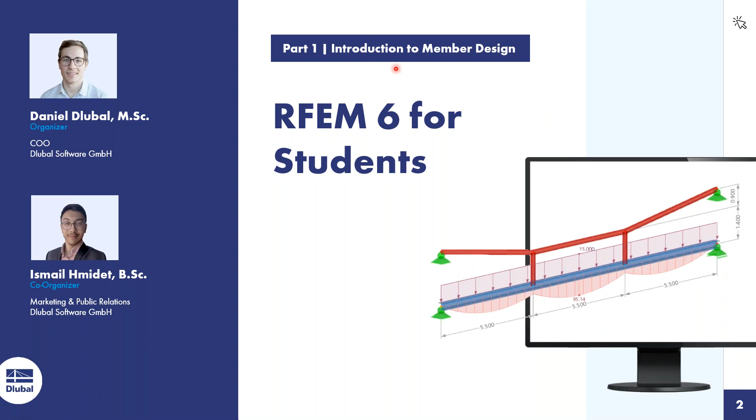We have the part of member design today. We will give you an introduction to member design and a few words about our platform GoToWebinar.

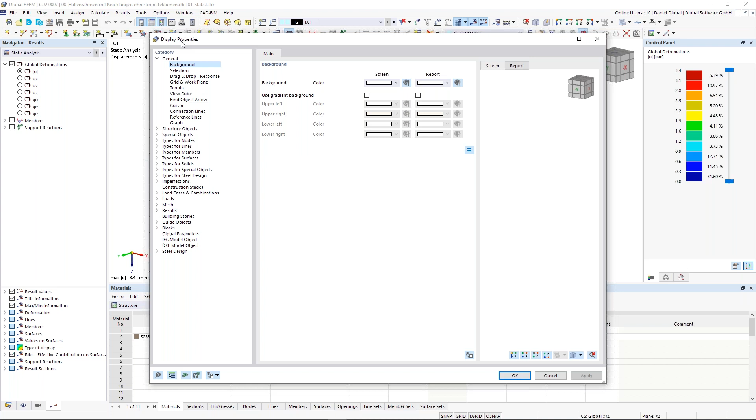Options is quite interesting. I work with a white window, but maybe some of you use a black window, no problem. When I go to display properties, I have the possibility to change the background, load dark background. When I click on that, it changes to dark, and I could use the dark background, so it's up to you how you will use it. I prefer the white background, so I go back to options, to display properties, and choose the white background and click OK.

We have today a lot of international students, so it's interesting that we also offer the program language in different languages. Let's click here on program options and settings, and in the tab of settings you have the possibility to choose a program language from those listed. So for French, Spanish, Italian and so on - we have this language option. There are also some other options, but for now it's enough to know that in the menu bar you find all necessary functions and commands.

Then we have the symbol bar. The symbol bar gives fast access to the most important symbols you need during your modeling, calculation, and load application of your structures. If you want to create a member or lines, just click on that and you can create it. I love working with them, it makes the whole process very fast, and there are also some visibility options here and so on.

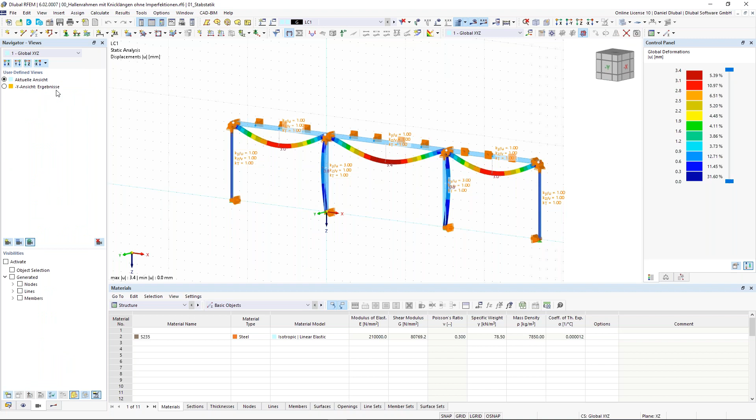Okay, the next navigator is the view navigator. Here I have the possibility to create user-defined views. Currently I see the structure from that view, and when I just want to see the results from the global y-axis or against the y-axis, I can click here and I see it like that.

Then I have also the possibility to set up some visibilities. I activate here, for example, members and choose the member by section. I am interested in the IPE profiles and I see it here like that.

Perfect, so let's jump to the last navigator, the result navigator. Here I have the possibility of showing different results. In this case, the global deformation. When I'm interested in the internal forces, I activate the members, activate the internal forces, for example normal forces, bending moment, shear forces, and of course also the support reactions.

Yeah, so much to that. Then we have the tables, where you have also a whole overview about all objects. You can create objects in the tables, edit them, and change values. This is a huge advantage because it gives you a very structured, very good overview, which is very clearly structured.

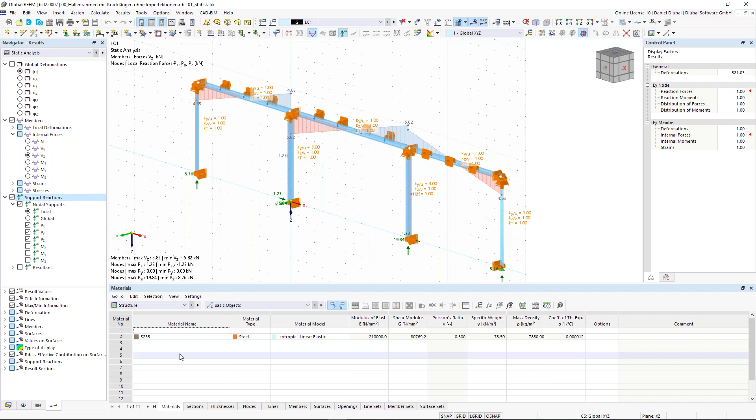I can also jump here to the HEB profile, for example, and adjust it with another profile. I can enter a different name and then it will affect all existing members with that. So it's a huge benefit to control it also via the tables, and it will also be very important when we have the interpretation of results.

Okay, now the control of RFEM 6 is quite easy. It's familiar when you are familiar with other software applications like CAD programs, AutoCAD from Autodesk, then you will get familiar also with RFEM 6.

So with the left mouse button, I can select different things. When I go from the left upper corner to the right bottom, then I can select all objects which are included in the selection window. When I go from the other side, I select all things which are also in this window, but not as wholes. I can select them as whole object. So everything that is touched inside this selection window will be selected.

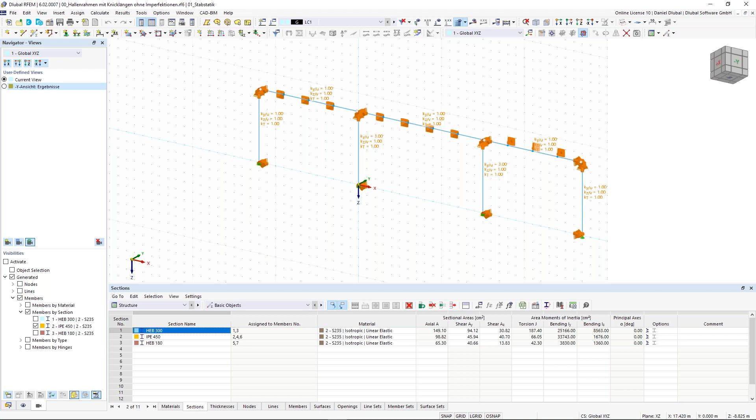With the mouse wheel, I can zoom in and zoom out. When I want to rotate my working area, just press the Control key on your keyboard, press the mouse wheel, and now you can rotate your working window. You can also use this view cube - it's a new function in RFEM 6 that makes it a lot easier to change your views for your structures.

Okay, good. This was the introduction to the user interface of RFEM 6. RFEM 6 is a 3D FEA program for the calculation of members, trusses, but also for surfaces, shells, and solids. With RFEM 6 as the main program, you can calculate and get results of internal forces, stresses, support reactions, and deformation.

When you want to perform different material-based designs like steel design, timber design, and concrete design, you need the add-ons. The add-ons will be part of our later trainings in 3 or 4 weeks when we jump into steel design, concrete design, and timber design.

Okay, now let's start with a very simple example. For those who would like to model with me, now follow my steps. So I create a new model by clicking here in the file and create a new model.

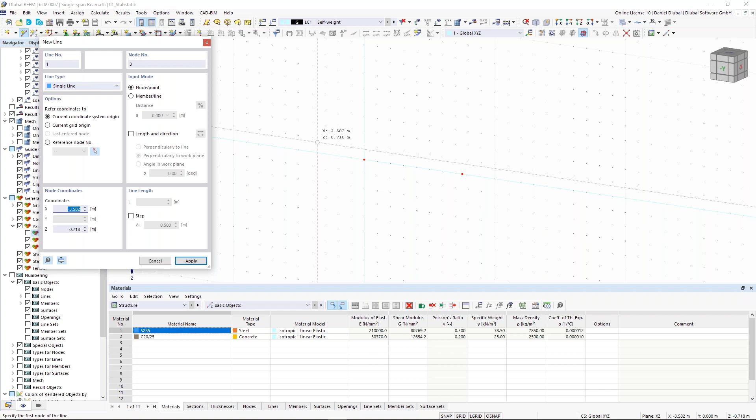So now I see these two nodes, and in order to create the line, I go here to 'line', click on new line, and now I just connect these two nodes with the line. By double right-clicking or pressing escape, I cancel this function or command.

Okay, now we have this line, and as I said before, in RFEM we have the philosophy that different objects are linked to other objects. So now I double click on this line to show what I mean by that connection - I can assign a member to an existing line. So I activate this 'member' option and a new window appears.

In this window, new member, I can create a new member with a member type and assign them also a section. In your studies, especially in the first semesters, you calculate your structural systems with no stiffness, but in reality you have stiffness. In order to consider also the pseudo stiffness in the first phases of your study, I refer to the member type definable stiffness. So we create a kind of fake or pseudo stiffness.

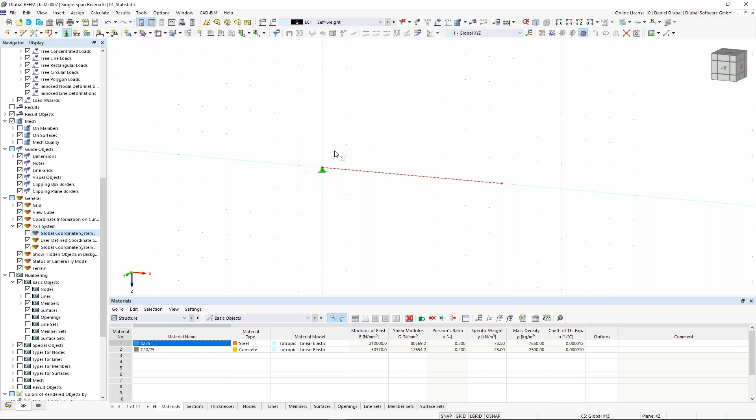So you see here this member as this kind of thing. Now we need support. I go here again to the symbol bar, click on assign nodal support, and I choose the hinged support, so I will activate all translational forces. Choose this node, right click to close the function, and now I go back again and choose the support with the roller in the X direction in order to release the X forces, and now I have here a single beam.

I can show the supports a little bit bigger just by right-clicking on it. I can adjust the size of the graphic, and now I activate load.

In RFEM, when you want to create loads, you have to assign them to load cases. By every new model, one load case, in this case the self-weight, is already done automatically in the background. So I jump to the load case, go to edit active load case. When I want to recalculate or compare my hand calculations with RFEM, it's necessary that you normally don't consider the self-weight, because it can cause you to not get the same results as your hand calculation. So for this simple example, I deactivate the self-weight and rename my load case name to test load. I click on OK.

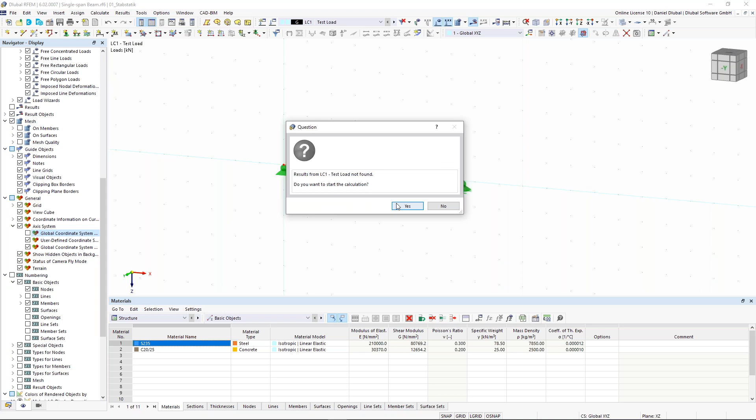So the next thing is calculating the structure. I have two possibilities: I can show the results of this specific load case, or I can calculate everything. In this case, I will show the results of this load case. Then this question arises, and I say yes, because I want to see the results of this load case. In the background, RFEM calculates the results, and then we take a closer look at that thing.

Okay, so first of all, we see the deformation. The deformation is, of course, a little bit nonsense, because we have 99,000 millimeters deformation, since we don't have any stiffness defined. But in this case, only the internal forces are interesting for me. When you have statically determined systems, the stiffness of a structure doesn't have an influence on the internal forces. Only when you have statically indeterminate systems does it have an impact.

Okay, so I go here to members, in the results navigator, and activate the shear force. I see here the shear forces in kilonewton, and then the bending moment, My, 18 kilonewton meter.

Okay, interesting. So now I activate the support reactions. I see the support reactions, also pretty interesting. Now you can make a kind of plausibility check, so compare the support reactions with the shear forces, for example, and yeah, they are the same. So this was the first example.

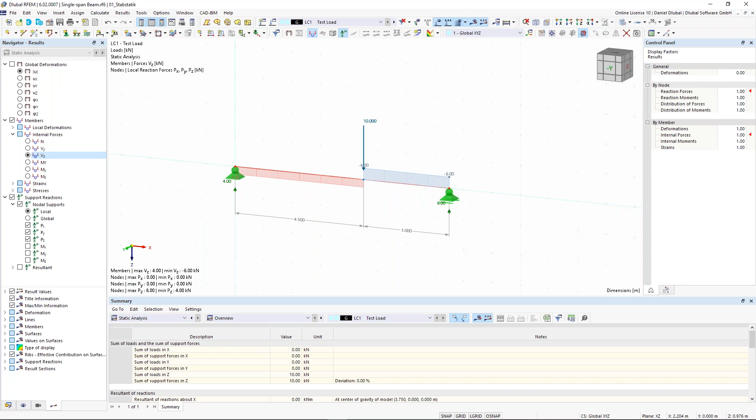On top of that, I would like to show you one more thing. When you want to measure the whole structure, I can give it kind of dimensions. So here in the symbol bar, I click on the linear dimension, click on these nodes, say okay, the second plane, and I can put the dimensions depending on my nodes here, for example.

It helps you make things easier. And one more thing: at each member I can also show the tensile direction. So I go to the display navigator again, activate the tree structure of the members, and in this case I can show you the member bottom fiber - that's the correct word, not tensile direction. You see here this dotted line, and this shows you in which direction the tension would go for the bending moment, for example, and also the member orientation and the member axis. But more on that later.

Okay, now this was it. This was the first example, and I have also a question prepared for you. So let's do this - it's a multiple choice question, so more than one answer can be correct.

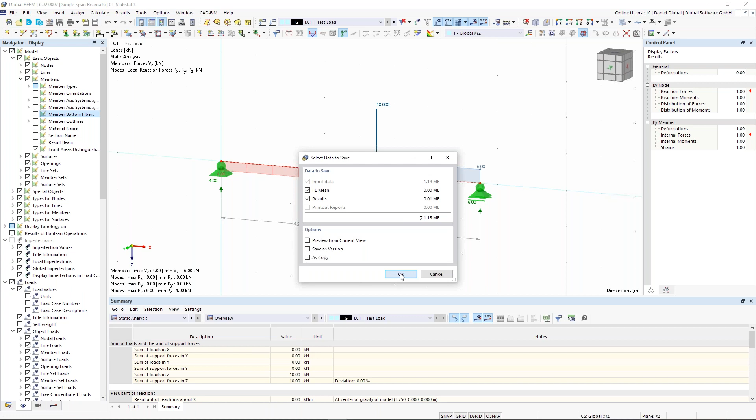I have a two-field beam, so I will save this here. I go to File and say okay, save as new. So I will create now a new file or new model: two-span beam. I click on Speichern - Speichern is the German word for save.

And I delete everything - just select everything and then press the delete button on your keyboard. And I create now two members. So now we have another philosophy for the two-span beam. I click here on the symbol bar, new member, and now I create a new cross-section, a real cross-section.

So I go here to the tab section, and as you see from the last project, RFEM remembers the last sections you were using for your projects. In this case I will create a new cross-section, so I go here, click on this button, create a new cross-section.

And I open here the cross-section library, and I am looking for a standardized profile. So in this case, an HEB profile. I scroll a little bit down and then I will find here this HEB profile. I refer to the Euro norm, so more to the Euro code, and here I find HEB 300. This is absolutely fine for me.

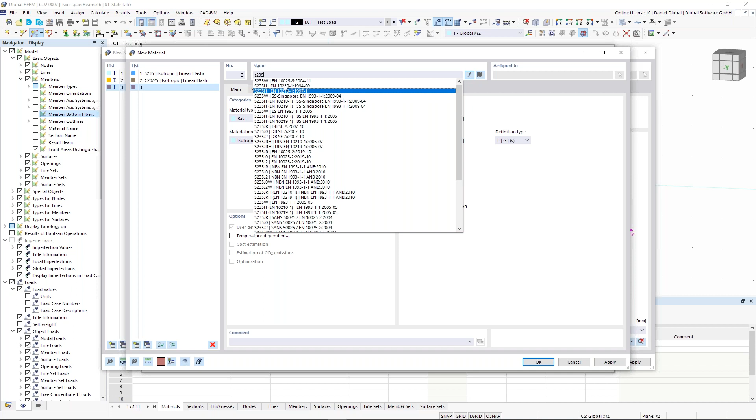So I can enter here S235, and now I can choose the one I would like to have. But I don't do it because I have it already here in this case, so I cancel it, and I just need here this one. Okay, I click on OK. And now you see here for my members that I have this HEB profile and this material. I click on OK.

And now I create a beam with a length of 5 meters. So just go here to this grid point, 5 meters, and again 5 meters. So the total length is 10 meters, but in the middle I have here this node.

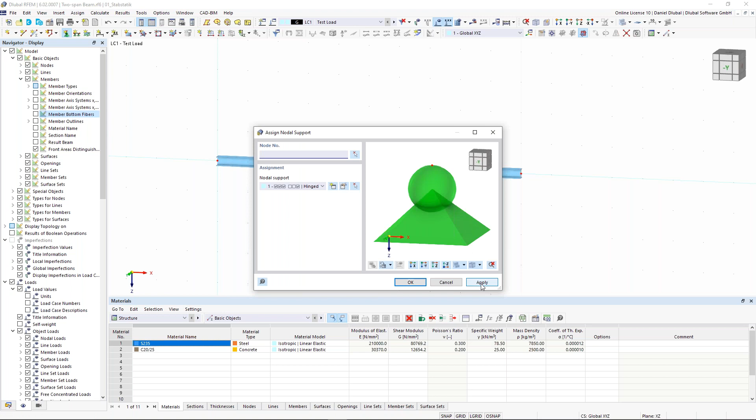The next thing is that I want to have here support directions. So I activate here this nodal support again. And now a very interesting function in RFEM is that we have this apply button, and I show you how it helps you assign different objects easier for your structure. So for the first node, I would like to use this hinged support. I choose hinged, this node, click on OK. And now I don't click on OK, but I click on apply.

And this node will be created automatically. The next thing is that I change the nodal support, choose roller in the X direction, and select both nodes with a selection window. Click on OK again, and now I click again on apply. And now you see how easy you can do this with this dialog. I click on OK, and now you see here the structure. Perfect.

So what's next? Yeah, the next thing is that we consider now different load cases, because when I refer to my PowerPoint, I will show you my PowerPoint. We have here this 2-span beam, and the information about the profile and so on, and also here 3 different load cases. And I would like to combine them in order to determine, first of all, the results like support forces, internal forces, and so on, but also the governing load combination, the leading load combination that causes the largest internal forces, because we will have here also 2 additional load cases like the imposed loads, at first for the left side of the beam and then the right side of the beam.

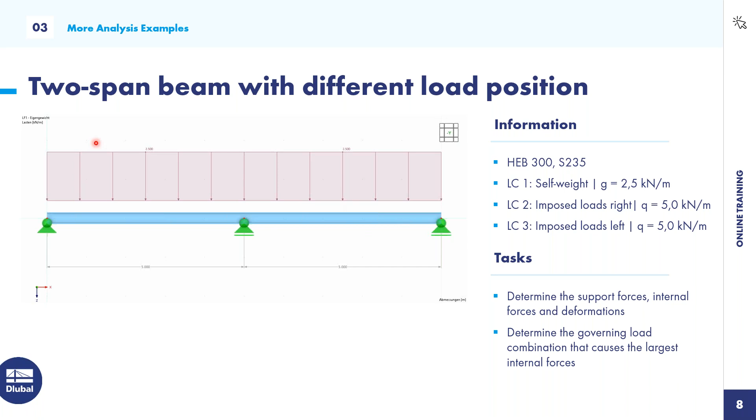Okay, let's go back to RFEM 6. Let's do this. I go here to the data navigator, because you can also access the load combinations or the load cases from the data navigator. Just click here on loads with the right click, load cases and combinations. It will open here this new window. And now this is also pretty nice.

I would like to combine different load cases to load combinations, and therefore I can refer to some standards. I refer to the standard of our Eurocode because I'm from Germany, this is familiar for me. You can also refer to other standards, we offer a lot of other standards, like the American standards, Canadian standards, and so on, and also the classical European ones.

Okay, and now I will also activate the combination wizard, because this is a kind of tool which helps me create these combinations of load cases automatically, and I don't have to do it manually. This is a huge advantage. So I go here to load cases, and I rename here this load case with self-weight.

I activate here the self-weight, and I create 2 new load cases. The new load case is imposed load left. I choose the correct action category, in this case imposed loads category A, according to my European standard. And now I copy the load case and call it right, because with that load case I apply the loads on the right field of this member.

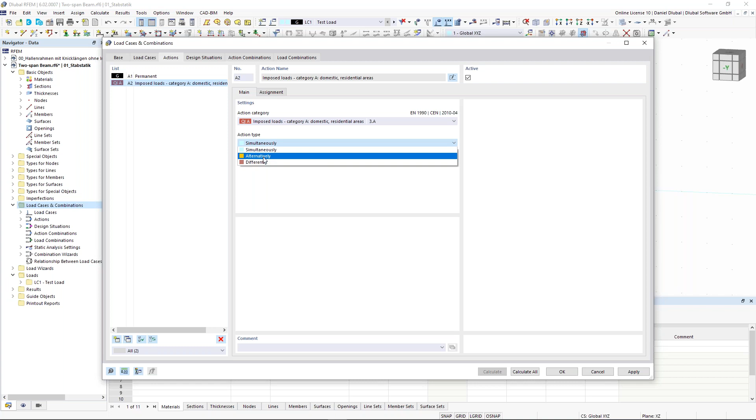When I choose simultaneously, this means that both load cases can be combined with each other. Alternatively would be they would exclude each other. So simultaneously would mean that load case 2 can be combined with load case 3. Alternatively, load case 2 with load case 3 can't be combined.

Okay, so let's go to the design situations. According to the Eurocode, the European standards, we have different design situation types. The serviceability state isn't interesting for me, so I delete them. Just the ultimate limit state, I go here through the information, and here you see short information about the combination rules, the permanent factors, partial factors, and also some coefficient combination, the partial factors.

So it's interesting how the program combines the factors for the load cases. Now you can see here the action combination. Let's jump to the load combination, and let's pick this one. Here you can see the partial factors, that is 1.35 times load case 1 plus the other partial factor, 1.5 times load case 2, and so on. And here you see also these leading load cases or leading action categories. It's pretty interesting just to know how the program considers these different load combinations. Load combination is nothing else than a combination of different load cases under the consideration of these partial factors and combination factors. Okay, I click on OK.

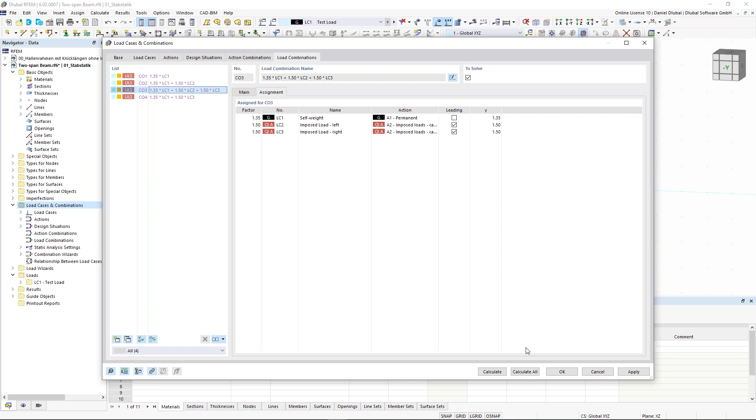Now let's apply the loads to the load cases, and this is the pretty nice thing. I go here to the load case self-weight, I go here to the new member load. And what is now really cool is that I can stay here in this dialog, in this window, and can apply and assign all loads to my structure, and change the load cases in this dialog. This is a huge advantage, and I like this very much.

So I click here on load case 1, self-weight. The load magnitude is in this case 2.5 kilonewton per meter. Now I select the members, draw a selection window because I want to select all members. I click on OK, and now apply and next.

Now this is a perfect thing: I can change the load case, change here the load magnitude to 5, and assign it to the other member, but stay in the same dialog. This is pretty nice, makes a lot of fun for me. I click on OK, say again apply and next, and the same thing I do for the right load magnitude. So for the right load and field, I click here the right field, click on OK, and in this case it is enough when I click on OK.

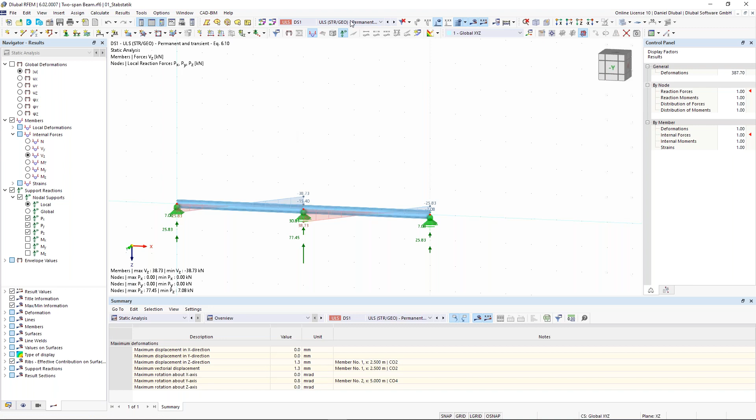Now let's do a kind of verification or validation interpretation. First of all, I always check my results in the self-weight load case because this is clear. I go here and check the results. First, the global deformation. I see the global deformation here.

When I want to see it with some colors, no problem. I go here to the chapter area members, and with diagram, deformation section colored. So the area deformation members and section colored would look like that. You can see on the right side a kind of control panel where you can see these colors.

The next thing is the verification of the vertical or support forces. I see here as sum: the sum of loads in the Z direction is 36 kilonewton, and the same sum here in support forces, so there is no deviation, and this is good for me.

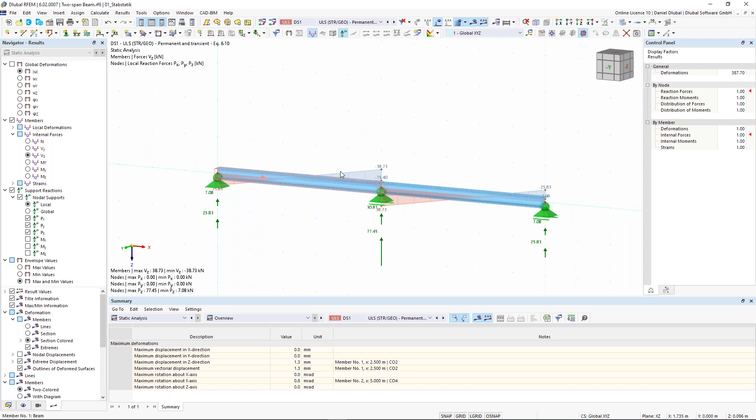Okay, the next thing is, let's go to the design situation. As I said before, I want to see envelope values. So let's go to the members, and now you see different kinds of distribution values of the shear forces and also the bending moment.

I can say, please show me the maximum values. So in this case, the maximum field moment. And when I take a look at the minimum values, I see it here. The minimum is minus 37, so the support bending moment.

This is the summary, and now it becomes interesting because I want to see the results by member. So I go to the table, static analysis, results by member, and I go to the internal forces.

Now I want to take a deeper look at the maximum field moment and the maximum support moment, so the most minimum and the most maximum value. I go to the extremes area, and here I see these two values, these two results.

I see here the maximum value of the bending moment My, and now I also see the corresponding loading, and this is, in this case, load combination 2. And for the minimum value, it's load combination 3.

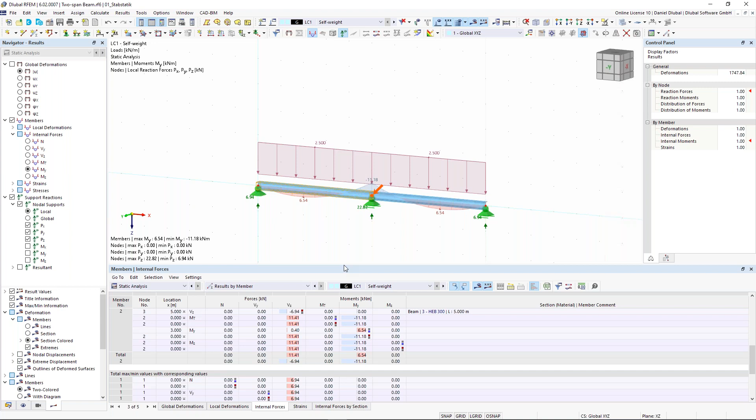So one thing more, I go through the self-weight. Now you don't have to do this with me, just pay attention, because this will help you when you are working with RFEM 6 and during your studies.

When you work with table books where you can interpret results, you just put in your dimensions and you get results for the maximum bending moment or shear forces and so on. It's important to know that these table books don't consider the shear stiffness, and RFEM considers the shear stiffness.

What is the shear stiffness? Taking into account shear stiffness leads to an increase in deformation due to shear forces. In order to deactivate it, you have to go to the cross section, and then you can deactivate it.

Remember here the support bending moment of minus 11.18 kilonewton meter. I go to the sections, in this case HEB, double click on that, and now you can see here the deactivate shear stiffness option.

And the influence of the shear is dependent on the cross-section areas AY and AZ. When I deactivate it, they have no value, and the shear stiffness isn't taken into account.

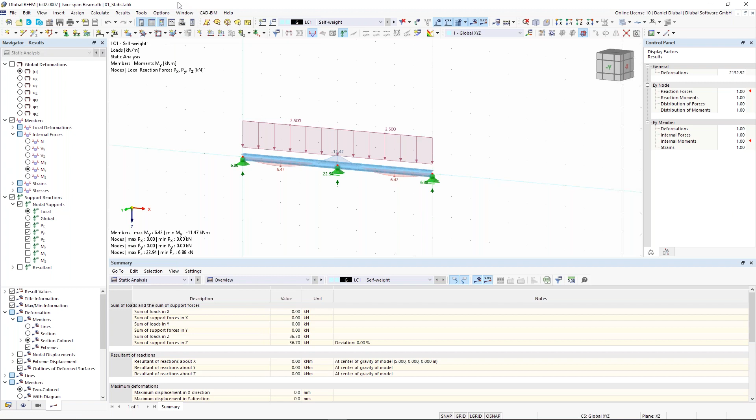So if you want to take a closer look at the standards we support, go to your project or model and right-click base data, or use this option in the symbol bar. Click here, and as Ismail mentioned, we support different standards. Go to the add-ons, where you can activate, for example for steel design, different standards. I click OK, and then you see we support different standards here, and also the different national annexes.

So let's continue. Now I will do an example by myself, so I'll make it a little bit faster. Just watch and learn. I delete everything again — oh no, sorry, I don't want to delete everything. Now I want to add hinges.

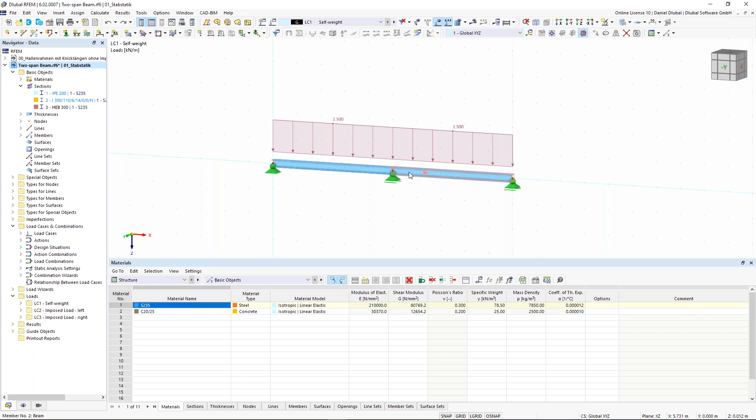This structure is one-time statically indeterminate, so I want to add a hinge in order to make it statically determined. How do I do that? I click on this member, then change the visibility mode to wireframe for better visibility. Then I right-click on members and divide the member by distance, and I would like to divide this member at a percentage of 17%.

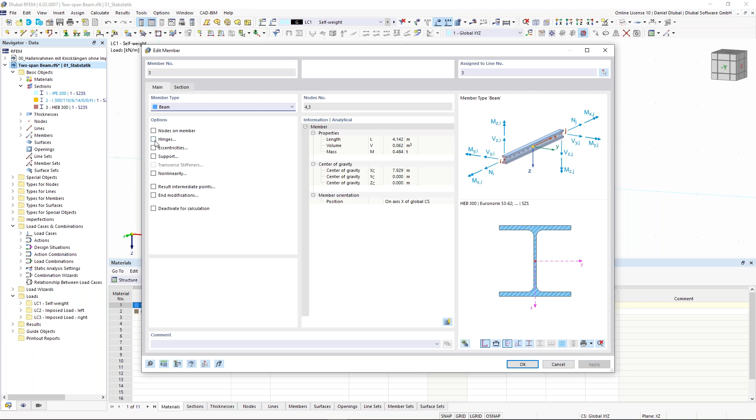Then I click OK, and a new member was created, because I will need this member for the creation of hinges. How do I do that? Double click on the right member, activate the option of hinges, and a new tab appears. Now I go to new member and choose new member hinge.

Now it's important to define the hinges correctly. In this case, the coordinate system refers to the local member axis, and I want to release the rotational, so I activate phi y in order to create a moment hinge, and there the moment will be 0.

When I want to release a translation or deformation, for example a normal hinge or a shear hinge, I have to activate these translational hinges. At first it's a little difficult, no problem, you can release normal forces, shear forces, and also the bending moment. What happens is I activate it and release it, and the value of this hinge will be 0. So I click on OK.

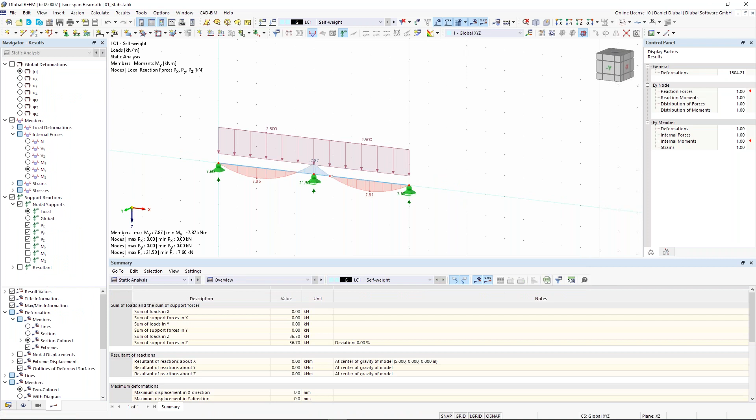We have assigned a hinge here, and this hinge means that the moment is 0 there, and it is 0. Additionally, we see that the field moment is 7 kilonewton-meter, and the support bending moment has the same value.

Interesting, huh? With these kind of hinged beams, in Germany we call them Gerber-Träger, named according to the founder of these systems. Hinged beams let us make these beams quite economically and also statically determined. The previous beam had one degree of freedom free, so when you calculate it with the force method, you need to find this undefined value, and with this hinge we make it statically determined, and this is a huge advantage.

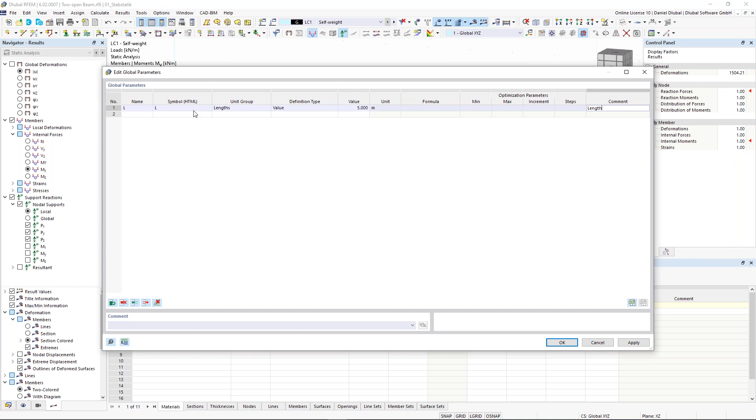And the same thing for this distance, this E, so this 17%, I give it the name E. Now I don't want to use a unit group here, I want to use factor, because it refers to the existing length by giving it a kind of percentage. I give it 0.1716, and this is the factor. Okay, I click on OK.

Now I have to assign these parameters to my structure by manipulating the coordinate system or the coordinates. The first node will remain at its position. The next one needs to be changed. So I activate, double click on this node, I want to set the formula, give the x coordinate the parameter L. I click on this arrow, click on edit formula, insert just my L parameter, and click on OK. Click again on OK.

The same thing here for this node. I activate the formula, and in this case it's L plus the factor E times L again, giving 5.858. I click on OK. And last but not least, I do the same with the last one here, just pressing 2 times L. Click on OK. Click on OK again.

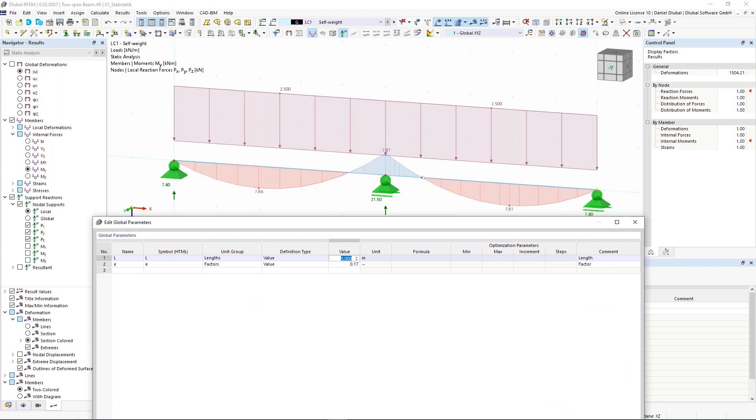And now I want to change the values, so pay attention to the structure. I insert here the value 4, let's do 3, and apply. And now you see how the structure was changed through these parameters. Interesting. Okay, so much to the parameters.

Next thing is just a structural system with various types of loads and also some supports. So I delete this again.

Now I will create the nodes with the tables. I go here to the structure, go to the tab nodes. The next 2 examples you don't have to do with me. I will do it a little bit faster, just giving you an overview about how you can do things in RFEM 6.

I create here a new node, going through the inputs with tab on my keyboard, and now I insert the coordinate 0 and 0, press enter. The next coordinate is 5 and 2, press OK, and the next one is 8 and 2, press OK. Now you see here that I have these nodes.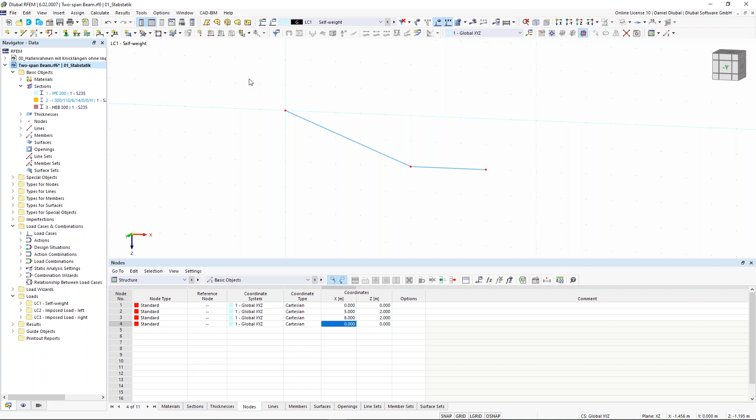Now I create a new member, the same thing, the section is HEB 300. I click on OK and I connect the nodes in order to create my system. Right click, and the next part is that I assign these nodes a kind of nodal support.

So I choose directly a node. RFEM 6 remembers the selection, and this is the reason why the selected node appears here in this dialog. I say fixed, okay, and the same let's do for this one. In this case I create a roller in X direction.

Now let's take a closer look at the definition of the nodal supports. Very important thing: when I want to have translational deformations in my support, then I have to release them. So when I activate one of these rotations or movements, then this support activates forces because it prevents the structure from moving or rotating.

So when I want to have here this support get vertical forces, I have to activate the UZ, because then it prevents the deformation in this direction, and therefore I will also get vertical forces. And the same also for the rotations. Okay, so much to that. I click on OK.

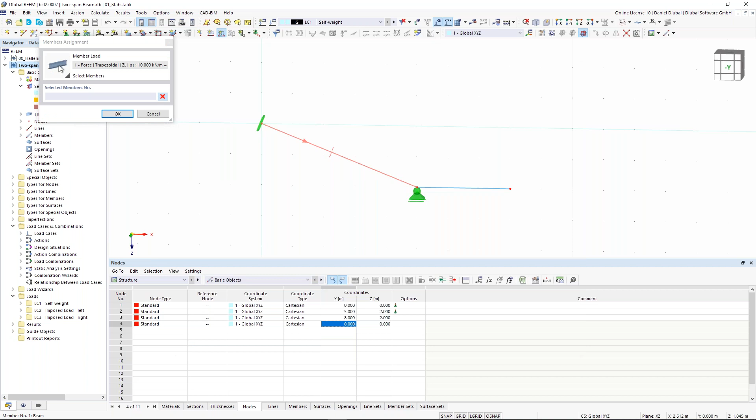I click here on new member load, and in order to have also some linear load distributions, I can say okay, I want that trapezoidal load distribution. I will start at the beginning of my member with 10, leave it here as 0, and say okay, at 80% it should stop. I assign it to that member, and this is now the nice thing, that I can remain here in the same window. Okay, apply and next.

And the next member load is another one on the second member. So I activate here 1 and 2, give them 20%, and choose the second member. I click on OK, and then I click on OK again. And now you'll see here the applying of these member loads, pretty interesting.

And the next thing is that I want to have here a nodal point load. So I go here to the symbol bar, new nodal load. And when I have inclined nodal loads, then I can separate it into different components, or I can also specify a direction.

In this case, we do 10 kilonewton for the normal Z direction. I choose this node and click OK. And now the interesting thing is that I can see the image where the node will appear on the whole structure. I can see it here.

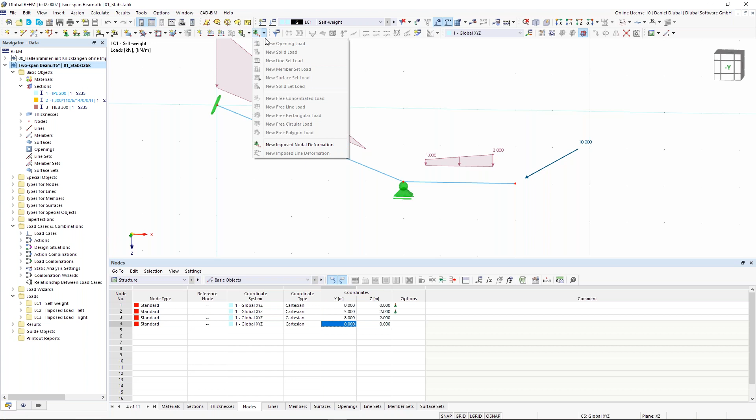And one thing more, I can also give some nodes a kind of imposed nodal deformation. I find this in the symbol bar. I say okay, new imposed deformation. And in the opposite of the global Z direction, I say okay, minus 20 millimeters. I assign it to this node. I click on OK, and say OK again.

Now I will calculate the structure. And for me, the results regarding the deformation will be interesting, because I set to that node a predefined deformation in that direction. And now I will see if it's correct.

Okay, well, internal forces, you can see the internal forces, shear forces, normal forces, and so on. But for me, it's more important the vertical deformation of this node. So I activate the global deformation, and now I want to see the UZ, the vertical deformation. I just want to see the lines, because then it's more clear to see the results. And yes, it's correct. Although there is a support, we have deformation at the support of 20 millimeters in the opposite global Z direction. Okay, so much to that.

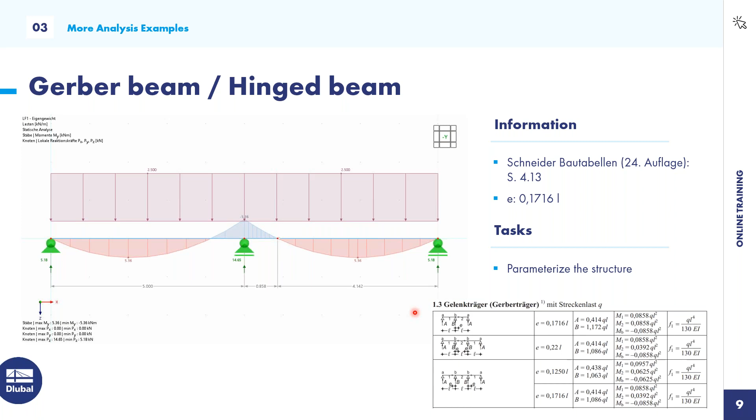So this was the Gerber beam or the hinge beam. Here also I have attached the definition of this E. It's from my student table book, Schneider Bautabellen. Maybe you have something similar in your country, I don't know. This was the last example.

Okay, so let's go to RFEM 6 and let's model this structure. I will use for the columns an HEB profile we had before. This is also an example you don't have to do with me, because I will do it a little bit faster. I will do this, so 5 meters high. Then I go here. Now I make the roof 5 meters to the X, and also 3 meters high.

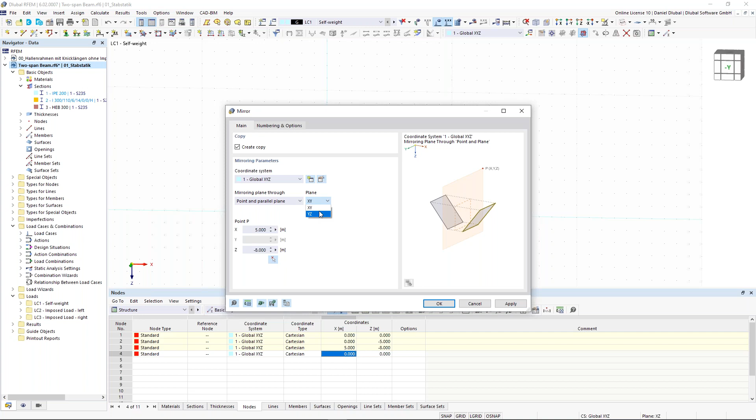Okay, the next thing is that we give them here an additional rod. And now we have different member types. You can see here we have the member type beam, and this member type transfers all internal forces to other beams. I can add to that beam additional hinges. Let's do it in that way, and then I will explain you other member types.

So hinges - I say to them the phi y should be activated, so that we will have bending moment hinges. And for that kind, because it will get tension forces, I can choose a smaller profile. So I will create a new profile. I will choose it here, CHC. I hope it will find. Okay, and I choose here this one. It's a kind of hollow section, circular hollow section.

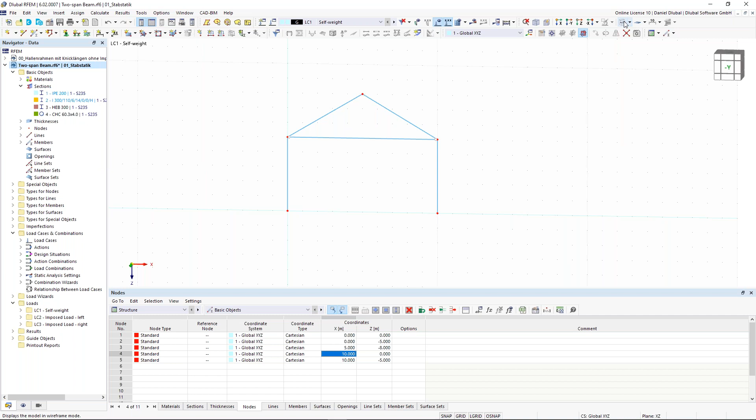Can be used for the applying of normal forces. Pretty nice. And I say okay. Now I draw this tension rod from the left side to the right side, and I change here maybe the display mode in order to see the right profiles. And now I create here the nodal support, click on OK.

And now I apply the loads. First of all, I see here my load cases. I have self-weight, imposed load from the last example. I want to change it. So I go here to edit. I change here this one to snow, and this one to wind, and this one to temperature, because then you see all possible load applications we can do. So distributed loads, single loads, temperature loads, or nodal restraints, nodal deformation, and so on, and now also the temperature.

Okay, next thing is that we activate here the base, deactivate here the standards because we don't need it for now. I click on OK. Now I apply the loads. I jump here to the snow load, go here to the member loads, and I have here 1 kilonewton per meter. And now the load direction for snow loads is different. It's not on the true length, it's on the projected length. I choose here both members. I click on OK. I say apply and next.

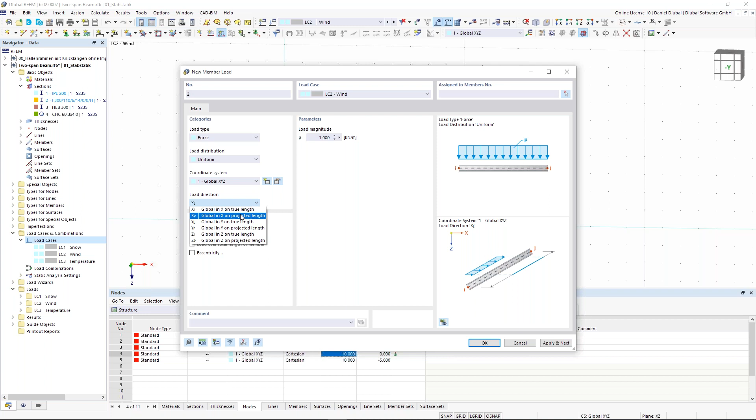And now I choose here the load case wind. Here the direction is to the global X-axis. So I say true length, first of all on the column. It doesn't matter if you have it on the projected length or the true length, because the column is vertical. Column, I say okay.

And now I want to refer and apply my load according to the local member system. So I say, okay, I want to have it like that and put it here, because normally the wind pressures are on the local axis of my inclined beams. So I say apply next. Now it looks like that.

And now the temperature, I will do it here a little bit different. I cancel the whole definition because I wanted to show you how you can make an object selection. So first of all, I want to display different cross-sections with a different color. So I jump here to the display navigator, scroll down to the area of the colors of rendered objects.

By object property, member, and now I want to see them by the sections, like here. So I have here the brown color for this HEB profile and the green color for this circular hollow section. And now I want to select all sections with the type of HEB 300.

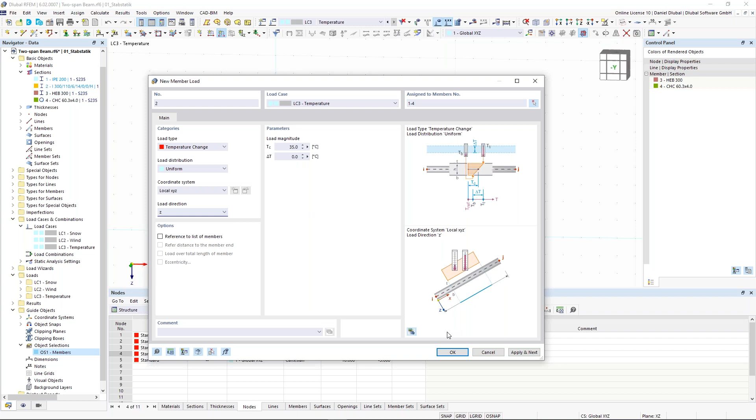Good. Now let's calculate all load cases. Then we will take a closer look to the results.

Okay, perfect. So as you can see here, maybe for the snow load, you see here the deformation. You see here the deformation. And also the internal forces, and as assumed, the tension rod gets tension forces.

And also when I take a close look to the members, I see it like here and so on. So now we have in Rfem different member types. This member type is a beam, but with hinges at the end of the member. In order to consider the same structural behavior, I can also choose the member type truss. Truss is nothing else than a beam type, but with moment hinges at the end of the member.

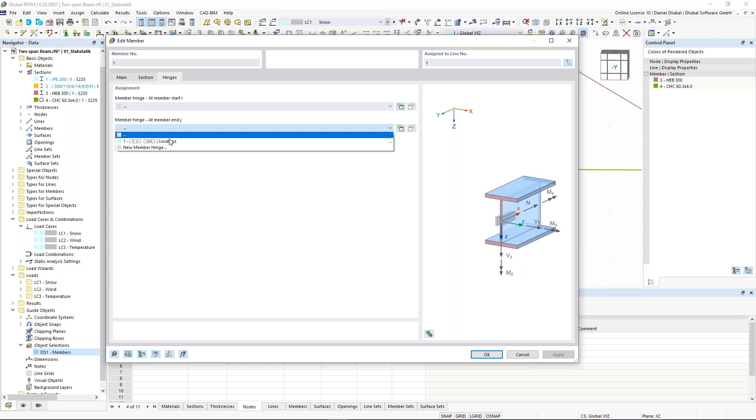When you want to have a whole hinge to be considered, it's false that you assign to every member a hinge. So if I assign a hinge at the member end, and to that member a hinge at the member start, then this would be nonsense, because RFEM crashes. We have a hinge chain, and this chain is not right, because it would cause an instability in the program, and the program doesn't calculate this.

So we can test it. I activate it. You see here this error and failure because we have a singular stiffness matrix, because the structure is unstable at that node due to the chain of hinges.

In order to avoid this, you have to remember just one thing. If you want to build a complete hinge where all members connect, you have to leave one member without a hinge. So I show you now the correct modeling of this thing.

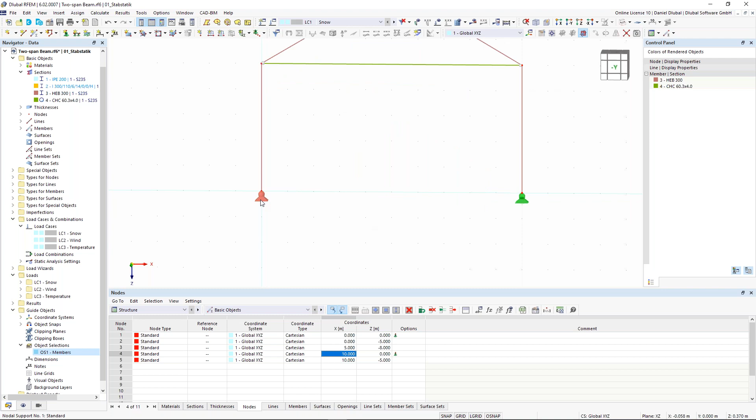I deactivate the hinge here, and now I want this whole triangular arrangement so that everything is connected with hinges. First I change these nodal supports to fixed ones, and then I assign a hinge at the top, and the same for this member. Click OK, and this would be the correct definition when I want to consider hinges everywhere.

I don't know the exact English word for that, but when I want to consider hinges everywhere, now I calculate this, and when we take a closer look at the bending moments, we will see that the definition was correct. Yeah, and we see it here. Here we have the bending moment, and every time where there is a hinge, we have zero moments. This would be the correct definition of the hinges for that case, for example.

Okay, next example. A truss, what we have here. I go here to the PowerPoint.

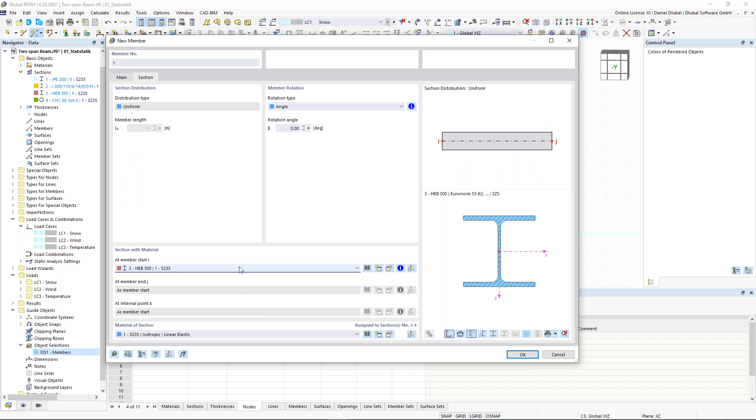So I delete this structure again. I create here a new single member with the truss type. This is important for the correct consideration of this truss. The section is, I take again this HEB 300 profile, and click OK.

And now I create this new member, but this was unfortunately the wrong way here. I have to do this by the general option, so I have to redo it, but no problem.

Now I put in the length and also the direction. I have here 3 meters, all sides are similar so I choose this one. 3 meters. Angle in the work plane is, in this case, minus 60 degrees. Then I can do it like this. I change this. I have it like this now.

So now I draw, or I can refer to this member. I say OK. From that array, and now I have this triangle.

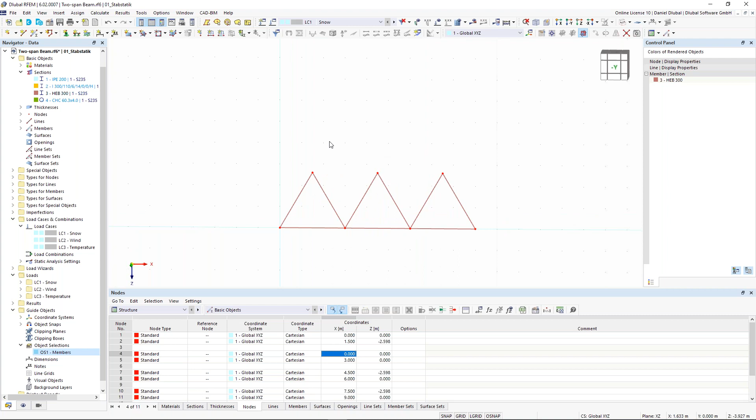So then I create again a new single member. I choose here the same object properties in graphics, so this enables me a smooth way to insert different objects or members, for example. I click here on OK.

Let's connect these two members. Now I have to correct the member type because I created them as beam type. I select everything and double click on one of the members. There are several members to assign, so I choose truss, and I can change all members at once to the member type truss, which carries only normal forces.

The next thing is assigning nodal supports. I give these nodes a hinged nodal support, and here again. Let me make them a little bit bigger, like that.

Now I assign nodal loads to these nodes. I go to new nodal load. I select the first node with 10 kilonewton, click OK, apply, and next. The next one with 20 kilonewton I assign to the right node, click OK, and say OK again.

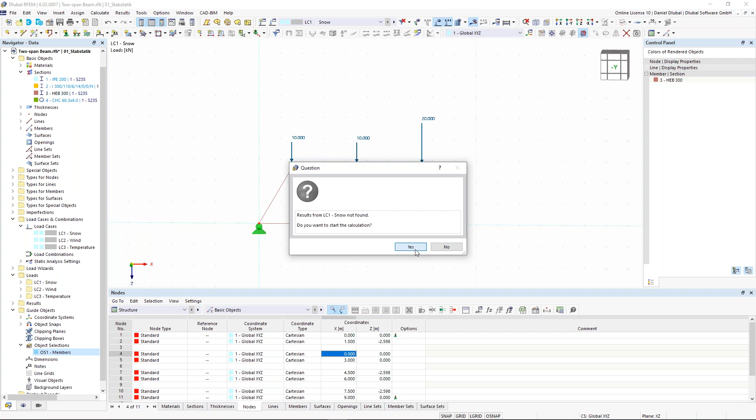Show me the results, I say yes. The special thing about trusses, and also about the member type truss with only normal forces, is that only the stiffness in the length direction is activated.

Let's take a closer look at the results. You see no moment, only normal forces. When you see member type truss only N, that means only normal forces are carried, and only the stiffness in the length direction is considered.

So let's go back to the normal forces. Remember, all compression forces are in general negative, and in RFEM, with the standard display options, they appear blue. All tension forces are in general red and positive. Here you see the tension chord and here the pressure chord, with the different normal forces. Again, negative normal forces are pressure members, and positive normal forces are tension members.

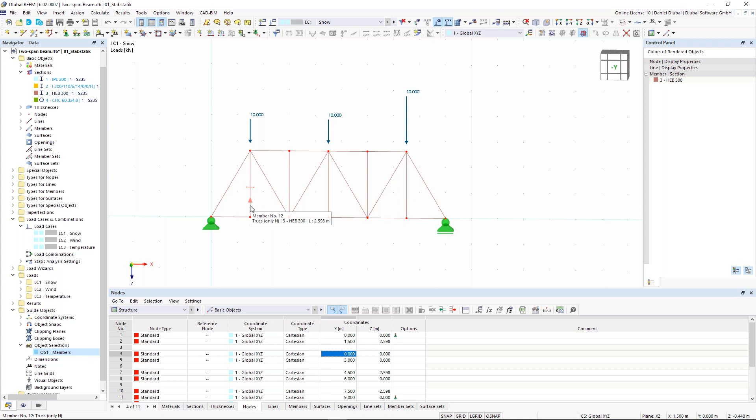Perfect, and the last one for that. Okay, good. There are different rules in order to determine these null members. These are the members which don't carry any normal forces, but are sometimes responsible, and also mandatory, for the whole statical indeterminacy.

Let's take a closer look at that. I will calculate it again. A classical student example would be: calculate this truss structure and determine the null members, the members that don't get any normal forces, and then also determine the positive and negative normal forces, the tensile and pressure members.

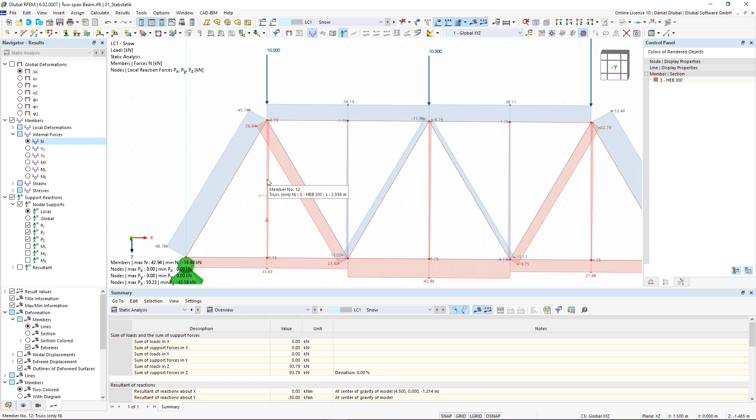As you can see here, these members get some normal forces. This is a little strange, but I can tell you why: because I considered the self-weight. Here in this load case, I deactivated it. Now I calculate it again, and now you will see these members don't get any normal forces because of their structural behavior. Yeah, no normal forces. So much to that.

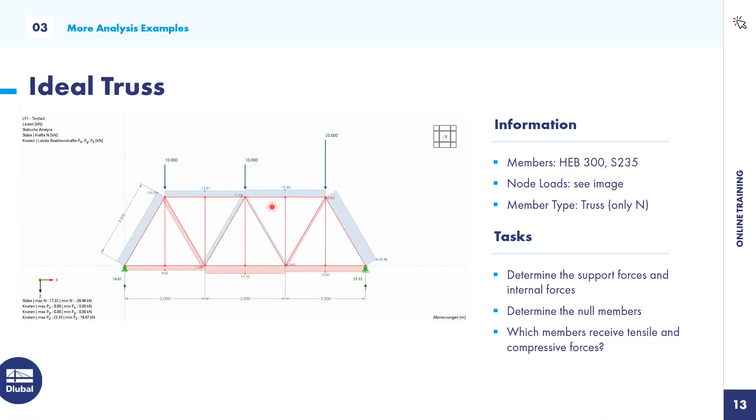So this was an ideal truss, but in reality we have trusses which also carry some loads, where the loads are applied on the structure, not on the nodes. So I delete this again. Now I will do an example where you don't have to follow along with me. I'll do a kind of spanned beam example. Here we have a normal beam which carries bending moments, which is also bending active, and this supporting tensile structure is just carrying normal forces. So let's model it.

So I create here again a member with a HEB cross section. I click on OK. And the length of this member is 16.5 meters. I say OK.

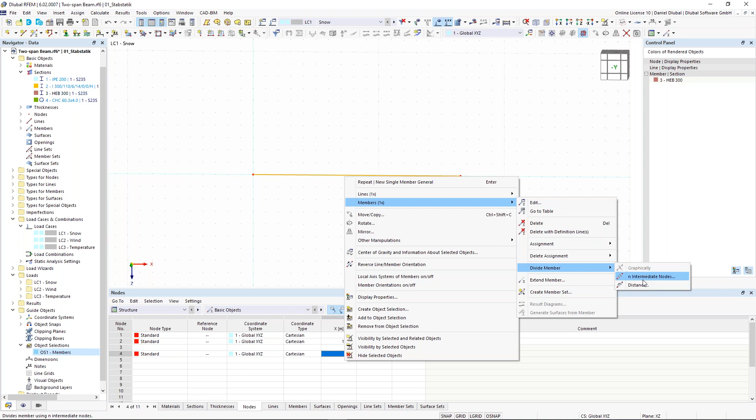Now I divide this member internally into two nodes in order to get two nodes. So right click on that, members, and divide member now into intermediate nodes, because they will have the same length. I click here on 2 and select this option.

This option will cause that the member is not divided into different members, but we will get the nodes. So here we have the blue nodes, and you see, when I go through the member, it is one member and not three members. But I have these nodes, and this is pretty nice, because then I can refer to this structure more easily and see the results more easily.

The next thing is that we create another kind of member. In this case, the truss, only normal forces. Section is this IPE 200 profile, because it's a little bit smaller. Now I just choose the length and direction, 1 meter, and go here 1 meter upwards.

Now I want to create here also a member. I choose here these two nodes and these two nodes by clicking on the Control key. Right click on one of the nodes. I say move and copy. Now I can create a copy of the selected nodes. I say yes, I want to activate it.

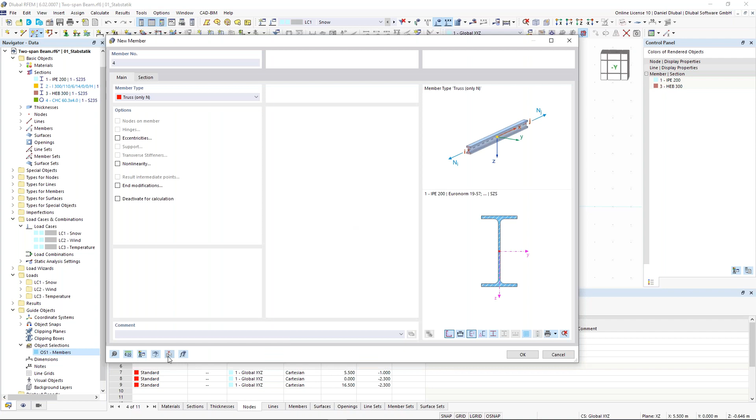Now I will connect these two lines. So I take here this beam. In this case, the truss only N, and I refer to this cross section. So I choose here always this select object properties in graphic. I click on OK. Now I draw it. So perfect.

So I change here the display model, and now I see that these local node coordinates are incorrect. So I want to change them. I double click on one of these nodes, and I can change the coordinates, and in this case I want to change them at -1.4, so it goes a little bit upwards. I say okay, and now the structure looks like that.

Okay, now I refer... now I have to assign some nodal supports. I choose here these nodes, give them this fixed support, and the same here for this one. This will be a roller support in X direction.

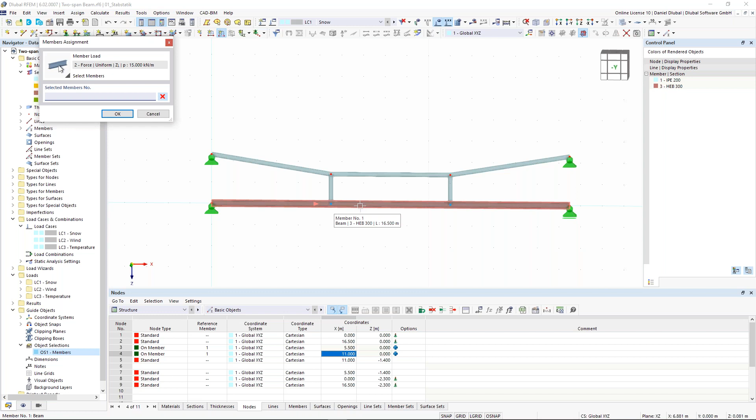Okay, and now I create also a new member load. I go here, click on new member load, enter a value of 15 kilonewton per meter, click on OK, and choose this member. The high advantage of this division with intermediate nodes is that I can assign and apply this load to one member. I don't have to click on three members. This is one of the advantages when I divide the beam into one beam.

So I divide this beam into two internal nodes, but the beam will consist as one beam. This is a high advantage in Rfem. Also the loads I can show a little bit smarter.

Yeah, now I calculate the result. Say yes.

And now you see here the result. You see here the tension forces. Yeah, because we have activated the normal forces and also the bending moment. And this example is pretty nice because it shows the following thing.

When I take a closer look at the deformation, you see, due to the load applying on the beam, it deforms downwards. Yeah, but we have here these tension members which carry the member, so the beam, and this is also the reason why these things get tension forces.

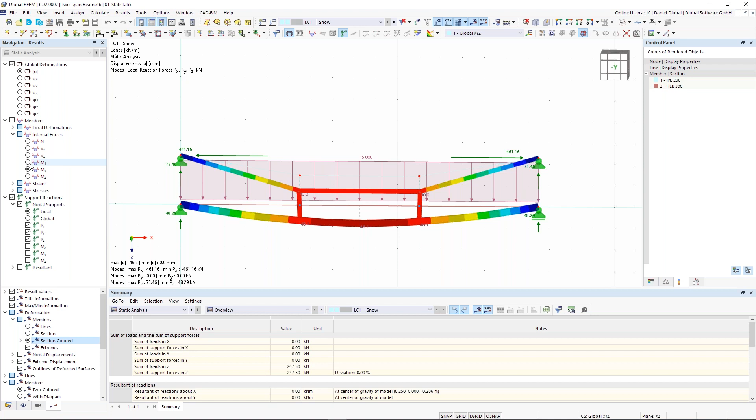And this explains also this interesting bending moment distribution, because here we get additional normal forces. You can see it as an additional support, and this is the reason why the bending moment looks so nice here. Also the normal forces. Okay.

So, we last do have an example. Yes, Daniel, real quick about this example.

I got a pretty interesting question about how we would model a double beam if, for some reason, the bottom chord fails, and it's already in place, and an engineer decides to add another beam. How would you model that in RFEM? Would you add another beam over the old beam, or how would you try to model that? I'm not sure I understand the question, but if you do, maybe you could answer it. If you already have an old beam as the bottom chord and want to add another one in real life, how would you model that in RFEM?

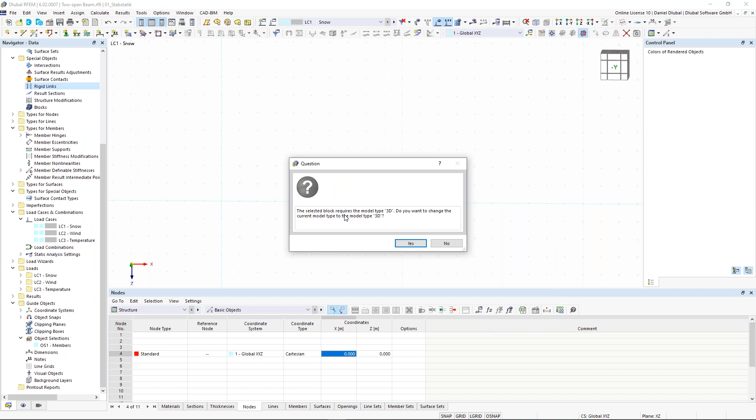So here in the Dlubal Center, we have blocks, and there I can create trusses, for example. I choose this 2D truss, and I can generate this kind of truss very easily by just giving the block some parameters. I click on OK. I choose this one, I say yes, because now the block requires the model type 3D. I say yes, because we will also use this model type 3D for our next examples.

So next thing is that we see this truss - pretty nice. For those familiar with programming languages and scripting, these kinds of blocks were created with the programming language JavaScript. So if you are familiar with JavaScript, you can also program your own blocks, and this is very powerful. This is also one of my future theories regarding the whole civil and structural engineering field - that students should know how to program, because then they have a real advantage in modeling, defining, and designing their structures with different parameters. So I can only recommend learning JavaScript or any other programming language, even if you are a structural engineer.

So let's go back here to structure. I put here number of bays: 6. The input via - I can choose between 2 different lengths. I choose this one. Total length is 12 meters, so the length of the outer bay is 3 meters, the inner bay is also 3 meters, and the height of the truss is 2.5 meters.

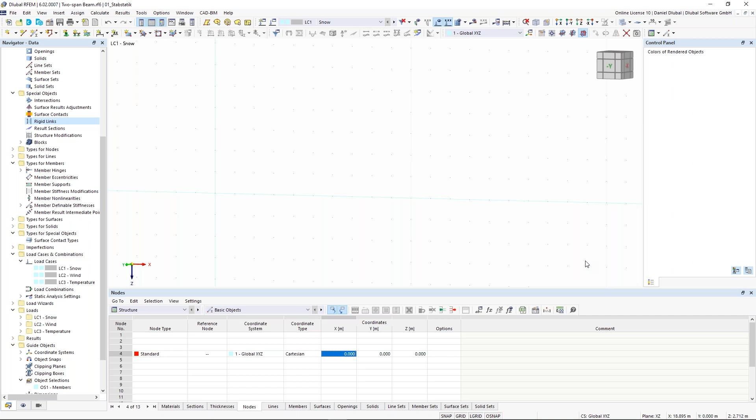So for that, I will model a very easy Euler case. It's just a fixed cantilever column. So I create this one. I click on beam, and now the section will be an HEB profile. I click on OK.

10 meters high. And now we need here fixed support, and on the top we need here a single load. In this case, I give here 100 kilonewton as vertical load, and also a small horizontal load in order to see the effects of the analysis according to the second order.

I click on OK. Now it will be interesting. Oh sorry, this is not correct. This one, I have to assign this one to the number 2.

Now I go to the load cases, because in the load cases I can assign the static analysis. So first of all, I will change here these two load cases, and I say this theory first order, and this one will be the second order.

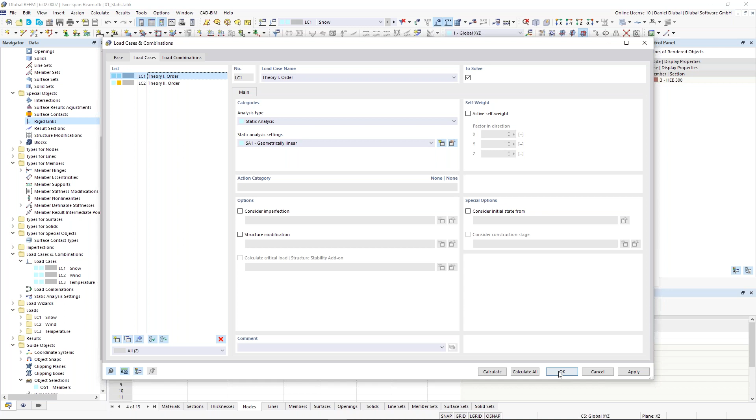When I want to consider P-delta or the second order, I have to change here the static analysis setting. And normally load cases are calculated according to the first order. So I activate it. I go here to load case 1, okay.

You see here the load case 2 and load case 1. And now I want to calculate both load cases, and then I will show you the differences in the calculation. I say calculate all.

Now I will create new windows. I will create a new window here, and again, now I can show several windows vertically. This one I don't need, so again, perfect. This will take a little bit. Here the same.

Okay good, here we have the results of the first order, and here we show the results of the second order. So first of all, the normal forces, but for this fixed column, cantilever column, the bending moment is for me more interesting.

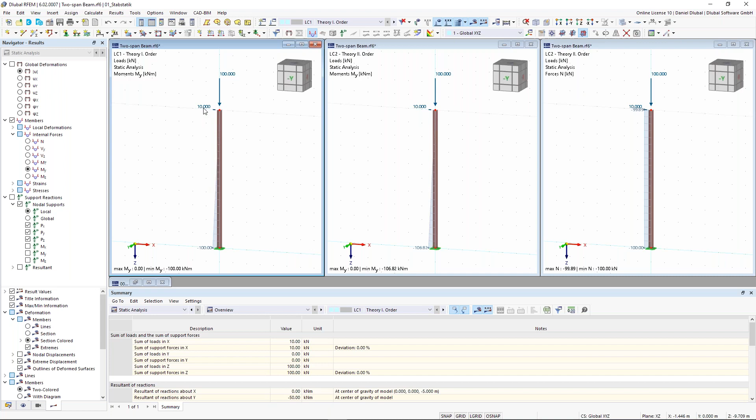Okay, so let's take a brief look. I think calculating the bending moment of this cantilever column is no big problem, because 10 kilonewton times 10 meters, so the height, this is my bending moment here at the support. This is according to the first order.

So when I calculate according to the first order analysis, then the program makes the equilibrium at the undeformed system. When I calculate according to the second order analysis, then the program makes the equilibrium at the deformed system. So you see here the differences.

Here, first order 100 kilonewton meter, and here 106 kilonewton meter. So we get more moments. And why? Yeah, because we have here also this vertical load, and this times the horizontal deformation on the top equals this bending moment at the bottom.

So I can explain this here a little bit better. So I will show me here the deformation in the horizontal direction, and then here the bending moment.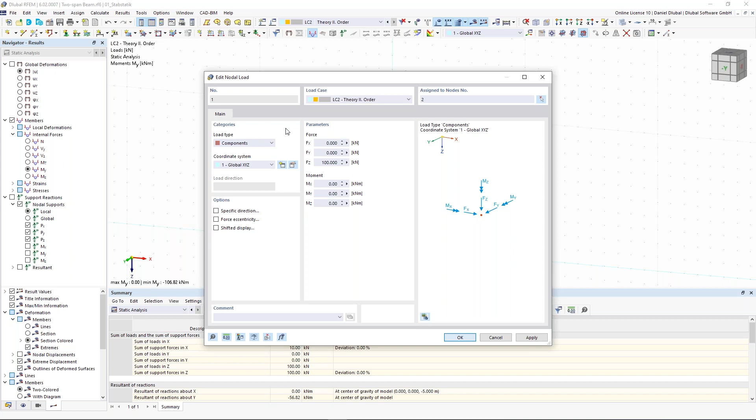Okay, so what I do now is performing a stability analysis, and therefore I have to activate an additional add-on. I can go here to edit model base data, and I jump to the tab add-ons, and I activate here the structure stability.

So what does this add-on do? It performs according to the eigenvalue method buckling shapes or buckling forms, buckling lengths, and also critical load factors. So let's do this for this simple example, because everybody in your study has already calculated maybe a critical load for these Euler cases.

Yeah, we can do this also in RFEM. So let's go here to activate this load case, and the only thing you have to do, and this is almost nothing, just activate here the critical load with the structure stability add-on in the load case or also in the load combination. In this case, we make it easy. We will use the load case, and you can also edit it. So here, edit stability analysis settings.

We have here different stability analysis types: eigenvalue method, linear, non-linear. For our reasons, it's enough when we use this linear possibility. And here we can set up how many eigenvalues we want to have. For this simple Euler case, yeah, 4 are enough. Normally it should be also 2. And I say why? I leave it as 4.

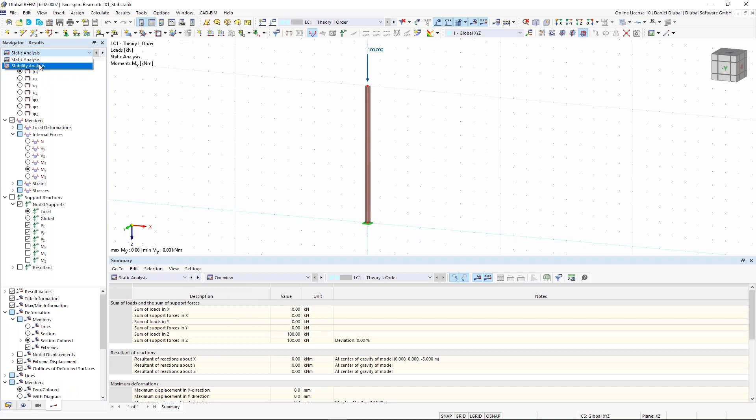Okay, and now let's take a close look to the results. We have here the summary, stability analysis, okay, and then also here on the left, stability analysis, also here in this pull down menu. And this is pretty easy. So when you want to get the normal results like internal forces, deformation, you go to the static analysis. And when you do a stability analysis, just go here and see the results.

So what can I see here? First of all, I activate here the control panel again. I will show me here this mode shapes in order to make the display factor a little bit bigger. So this is important to know.

The first eigenform or the buckling shape, yeah, it's this one. And why is it this one? Because the buckling shape tells me how the structure would fail when I would increase here this vertical load. And this would be the failure form, yeah? And in this case, the profile would fail around its weak axis, yeah, because with the flanks showing to the X direction, and this is the stiffer direction. And so the first failure would be around its weak axis. And this would be the first eigenvalue, so the first eigenform.

The second one would be around its strong axis. Yeah, this is interesting, but this is clear. So when you would design this beam, then you would add here additional lateral supports by avoiding this failure around the weak axis.

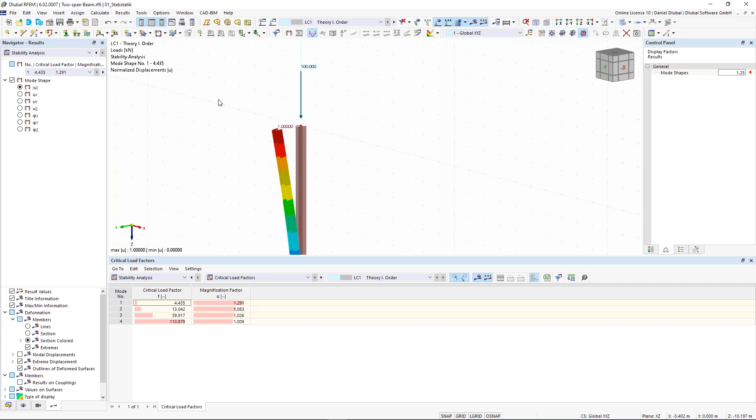When I multiply the 100 kilonewton with a critical load factor of 4.4, then I have 400 kilonewton. And when I would calculate the structure again according to the theory second order, the program would not calculate it because it says it is unstable. So if the critical load factor is smaller than 1 according to theory first order, then the structure is unstable when calculated according to theory second order. To put it in a nutshell, the critical load factor tells me how much I have to multiply the load with this factor until the structure fails. This is the critical load factor.

The next thing is the magnification factor. This factor describes the relation between the moments according to the geometrical linear static analysis, theory first order, and the second order analysis. So if I have here a result of the bending moment at the bottom, and I multiply this result by this factor, I would get the result of this bending moment according to the second order analysis, which is the geometrical nonlinear analysis. Remember, second order analysis is a geometrical nonlinear calculation.

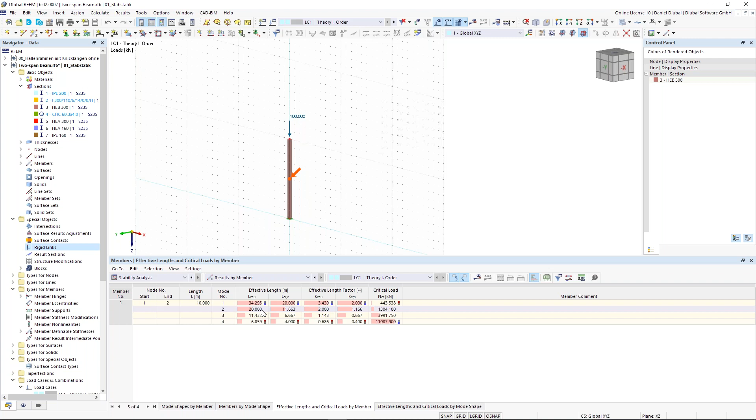This is pretty interesting because the critical load is the 100 kilonewton, so the existing load on the structure times the critical load factor. So, 20 meters, this is also the case for this Euler case 1. When I would have an Euler case 2, then it would be 10 meters.

Important note is that I have deactivated the shear stiffness here in order to get the same results as in my hand calculation, because we have still deactivated the shear stiffness, but in reality you have a kind of shear activation of the profile. This is also the reason why it's generally activated.

Okay, so last example, I have a fixed frame where we also take a closer look at the different buckling modes, buckling shapes, because then, I guess, it will be more clear.

So what I will do is copy the whole thing here. And now again, my favorite function, drag and drop 10 meters along the x-axis. I put here an additional girder. It is a beam. The section is an IPE 300. I click on OK.

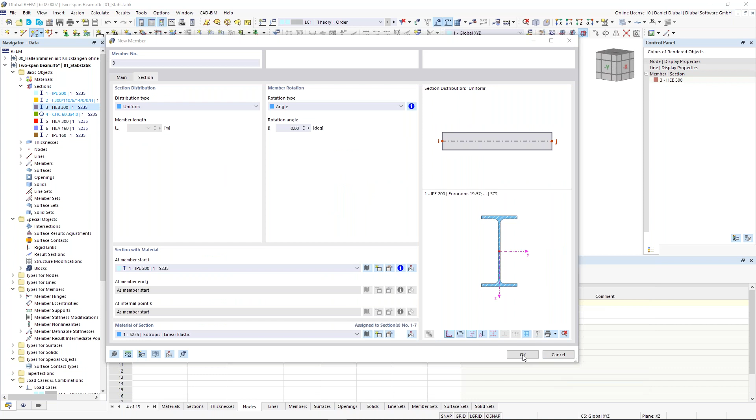And now I connect these two top nodes and change the height of the nodes to -6 meters in the Z direction. Now let's do the same as we did for the Euler case 1. I go again to theory first order, and now I activate 10 eigenvalues. So, okay, calculate it please.

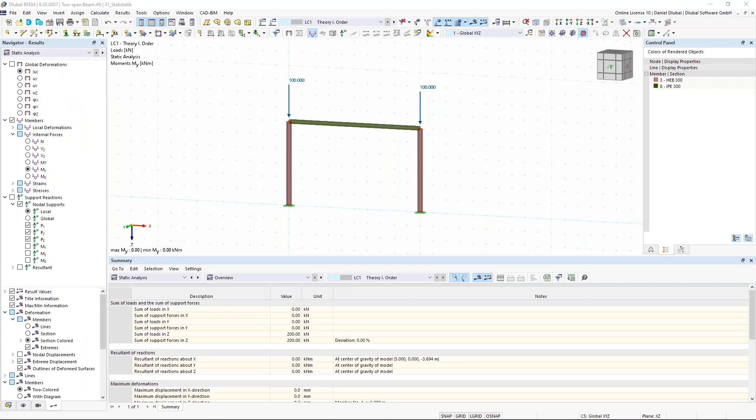So now let's take a closer look at the results of the stability analysis. What we see here is pretty interesting. Because we consider the 3D model type, we see that the first eigenvalue is a failure out of the plane. I increase the display factor. So out of the plane, this is pretty interesting.

Why out of the plane? Because we have here a failure of the weak axis of our HEB profiles. So the next eigenvalue is also out of the plane. Also interesting.

And the next one is in the plane. Okay, so as a structural engineer, what I would do is avoid the bending, avoid the failure out of the plane by adding some lateral support.

Let's take a closer look at the effective lengths. When performing a stability design of steel members, I would take this effective length here, and this is 2, because here we have our Euler case 1.

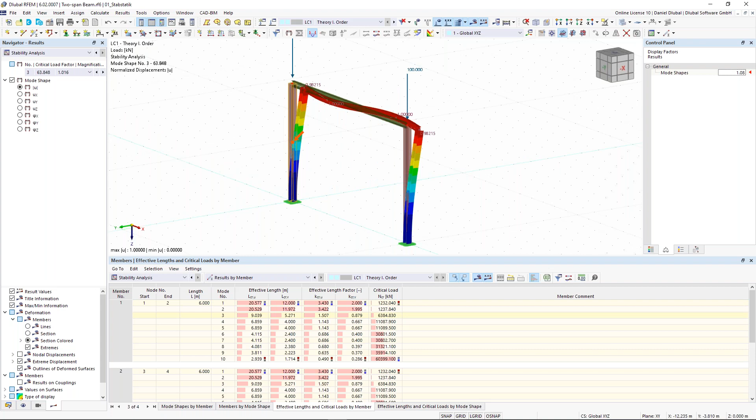So the next one, for example, here we have buckling length mode 3 of 1.5 around the strong axis. So when performing a stability analysis of this steel column, the equivalent length or effective length would be 9 meters.

Maybe you can also take another look at that one, number 4. Here we see the effective length factor is again around the weak axis. In this case, 0.67 — it's almost Euler case 3.

Now as the structural designer, I want to avoid structural failure out of the plane. So what I do is add some lateral supports. I'll add these nodes on the top, assign nodal supports, but only activate the U-Y direction, because this will be my lateral support.

I click OK and calculate the whole thing again. One important thing: don't mix the buckling shapes with the deformation shapes. This is a huge difference — I'll show you why.

This is the global deformation depending on these vertical loads. And the stability analysis, so the buckling shape, is another one entirely. So don't mix it up.

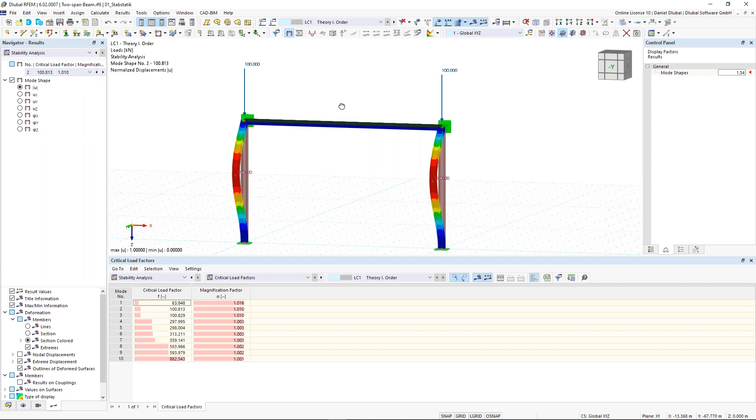So now we have the first eigenmode in the plane. This is maybe something we know from our studies — it looks like that. And now the critical load factor out of the plane would be here.

This one, the second one — I had to multiply this 100 kilonewton by 100 again in order to get a stability failure out of the plane. This is quite unrealistic, but now you have a feeling for how the structure fails when it gets too much compression force.

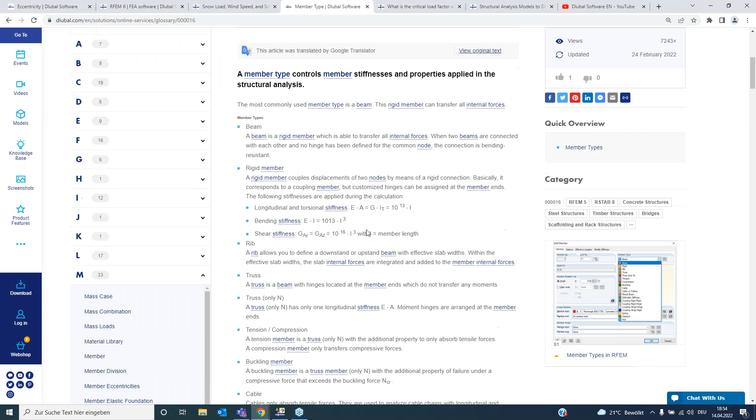You find the definition of it there. For another example, the member type, you find a more developed definition, since member type is quite a general term, and we are trying currently to make videos for every single term within the structural analysis wiki. One more thing, if you have any questions that we haven't answered during this online training, you can look for answers on our website using our FAQs.

We started offering this like a month ago, I think, Daniel. We have opened the possibility for you guys to upload your own structural models. You can go to downloads and info and choose to submit your own structural analysis model. For example, if you feel creative right after this online training and want to try RFEM and make your own model, maybe you can submit it afterwards to our website, and we can post it on our social media as well.